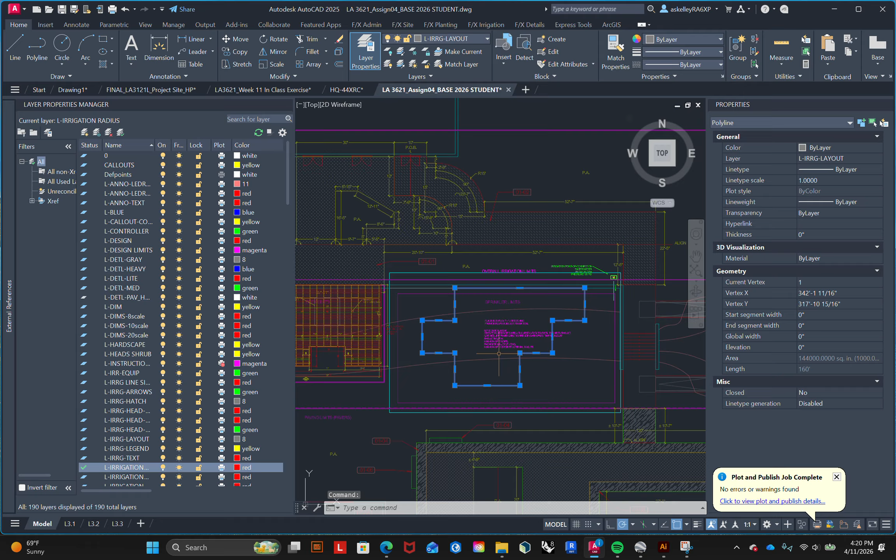Okay, tips on irrigation. So let's say we have this boundary. So I'm gonna bring it over here. And at the end of the result, you're gonna want to have something like this. So let me just bring it to the side quick. So this gray area is gonna be our landscape boundary.

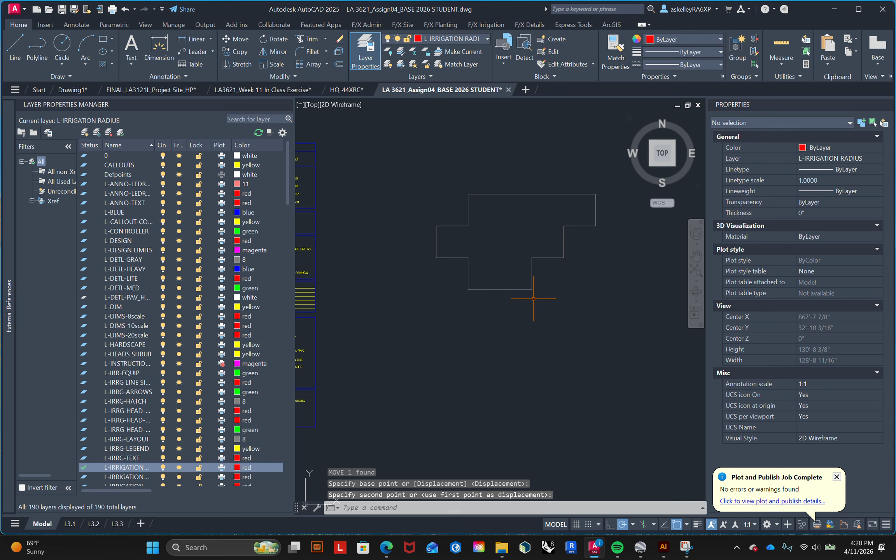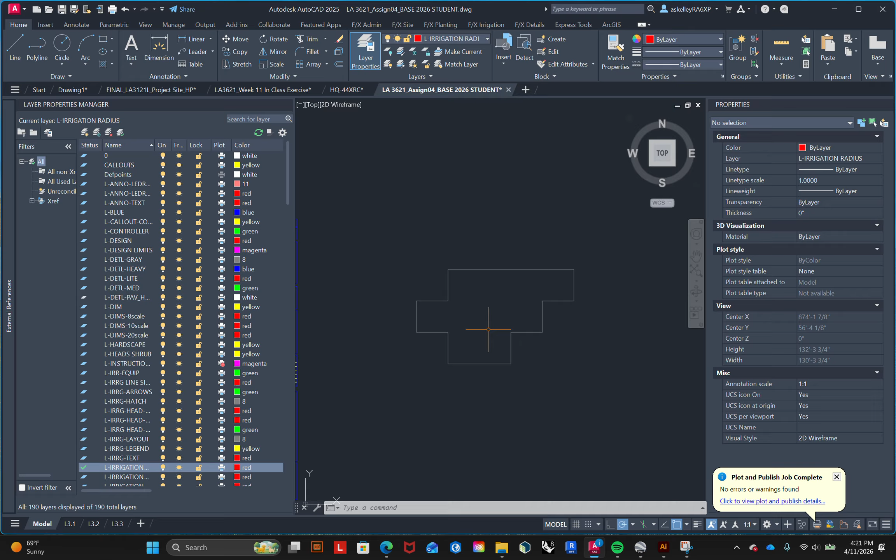And what we want to do is have sprinklers and have, in every single square inch in this area, at least two sprinklers spraying in the area without having sprinklers going over the boundary. So usually when approaching this, you want to start little first and then go big. So first we'll start with corners. And usually when it comes to measuring out how far each water should shoot out, you do the radius based on the shorter side.

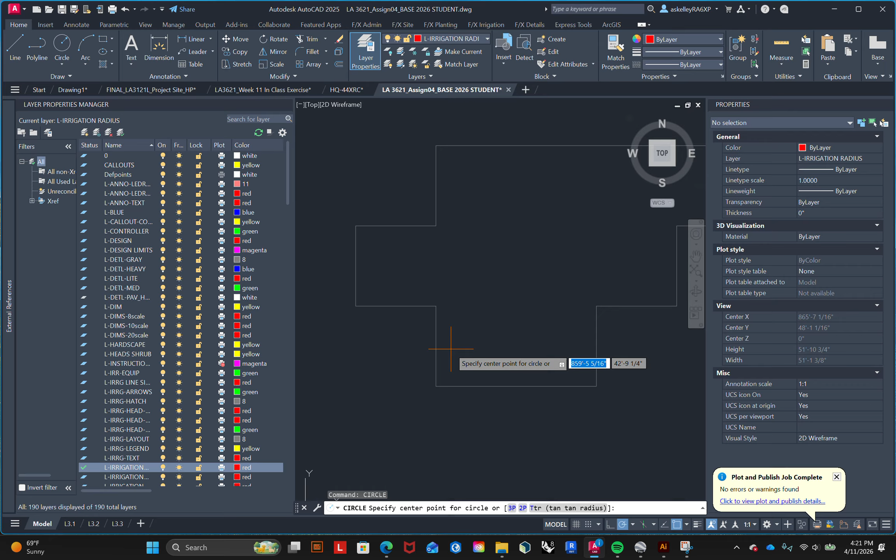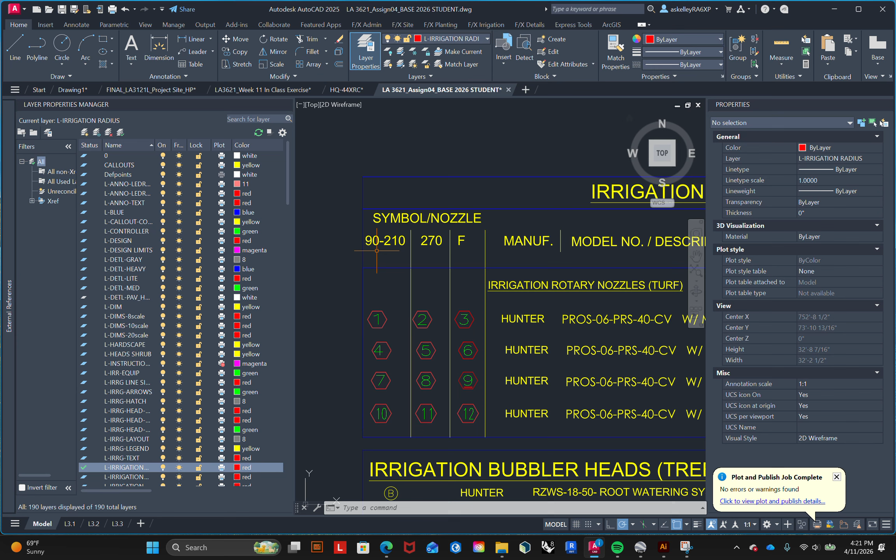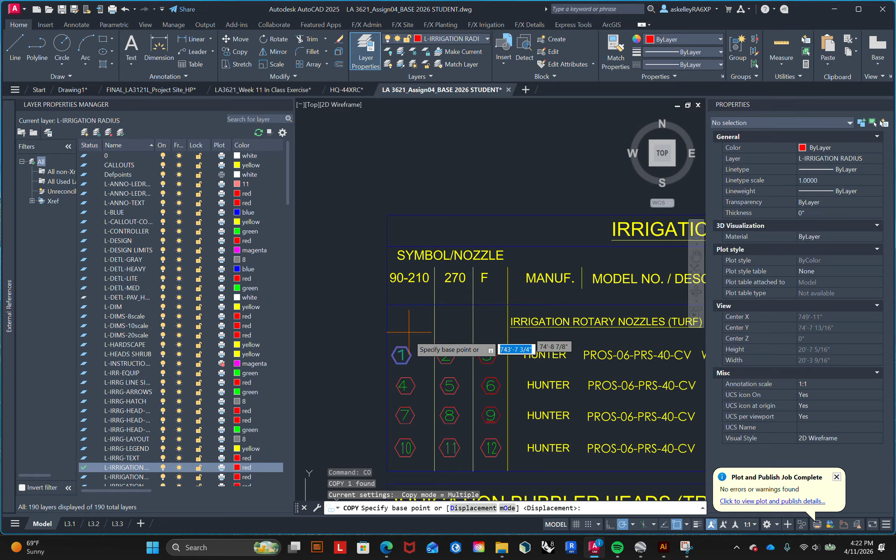So this is one corner. So this is 10 foot. So by looking at this chart, corner is 90 degrees. So 90 to 210. And what type is going to depend on these numbers. So since it was 10 feet, 6 to 10 feet, it's this. So we will use the 1 because it's 90 degrees and it's within the 6 to 10 feet range with that radius. So I'll copy this and place it here. Okay, that's one corner.

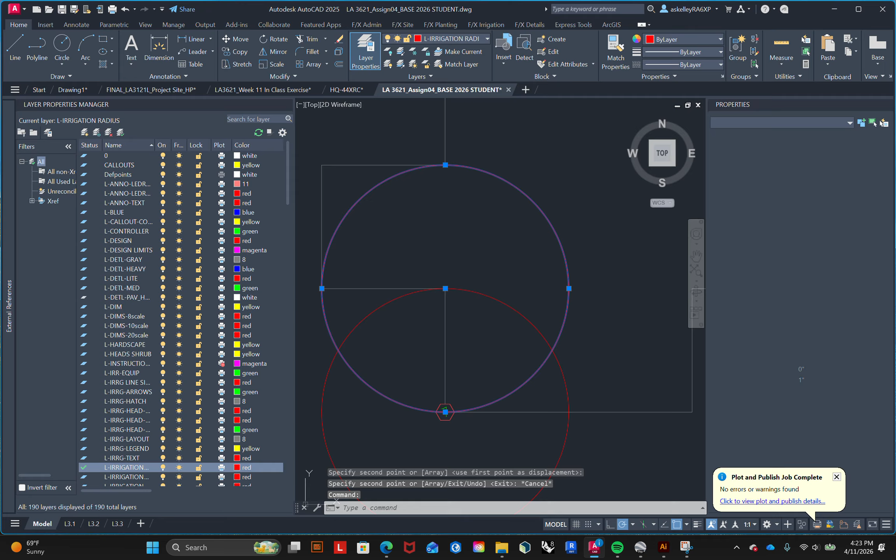But how about this corner here? Wouldn't you need a 90 degree? No. Because if you were to put a circle here, this square footage is 270 degrees. So since we want to start small first, we'll ignore this corner. But this one's a 90, so let's see what kind of circle this is. Okay, so it's 10 feet. So since this is pretty much the same thing, put this here. And this is probably the same thing too, so I'll put this here. This is a 270, so ignore.

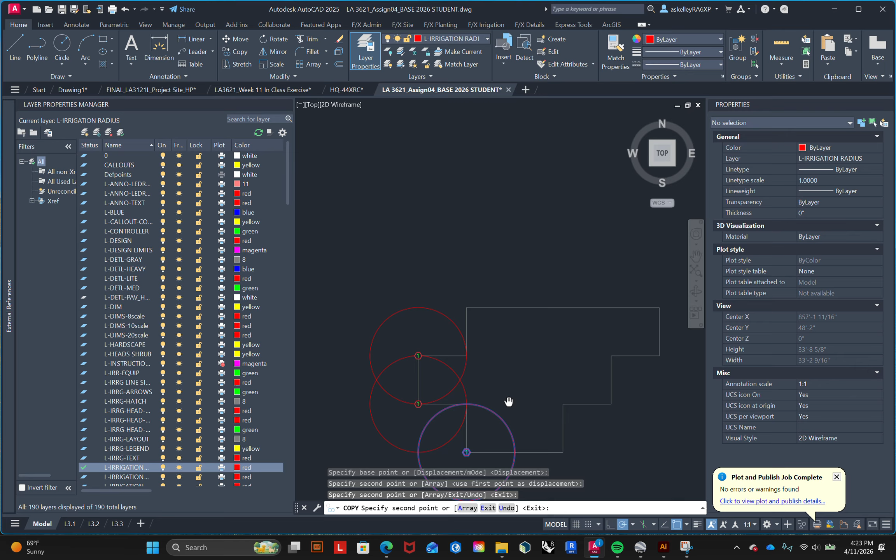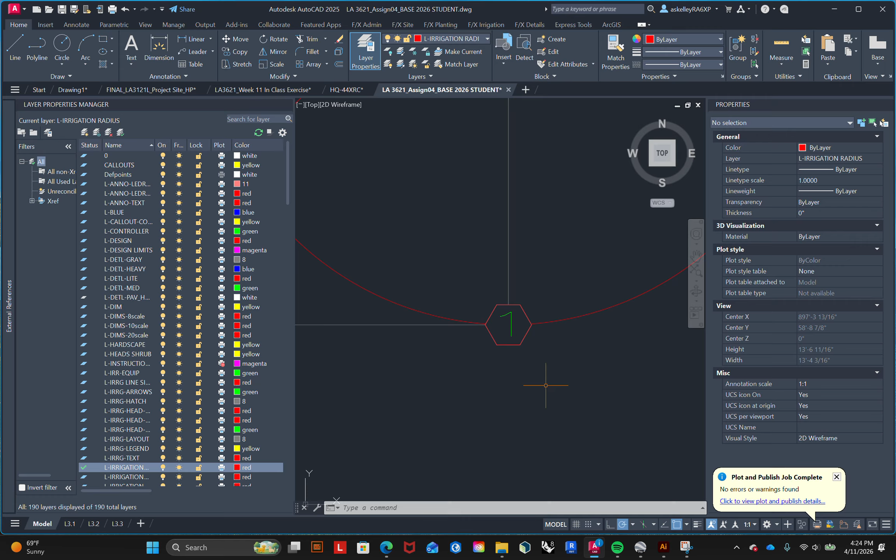So how about this one? This side and this side. Well, since this is the shorter side, we will be using that. So again, measure it out, and that's 10. So it's the same thing. Okay, the shorter side, let's just make sure it's 10. Okay, this is 10. You can also check, make sure if it's going corner to corner, the edge of the circle is going to meet the head of another sprinkler or another edge. That's how you know it's good. So this is a corner, and this is a corner, and that's it.

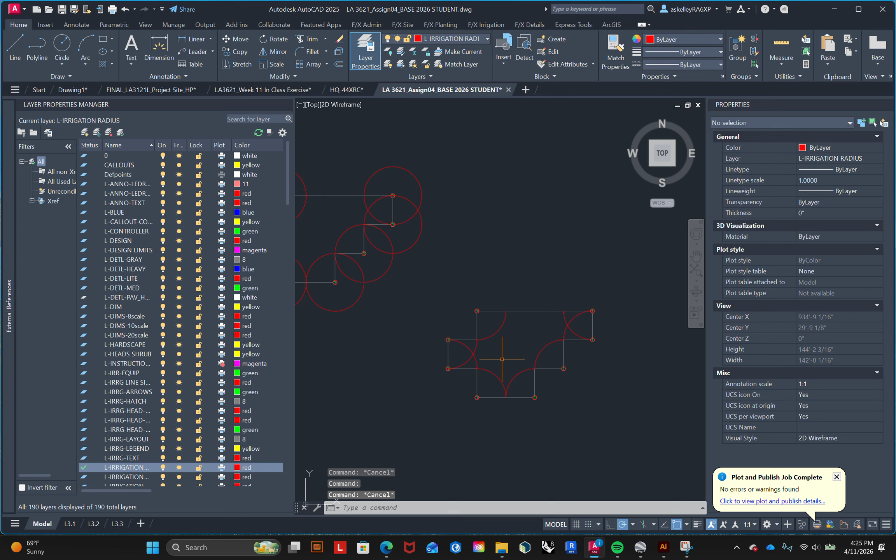So usually how I like to stay organized is color coding and cropping here and there. So let's see, make sure everything looks nice. So let me just trim the outsides. Yeah. So quarter sprinklers should be shaped like this, quarter of a circle. If it's not, then it is not correct. So now let's move to the other corners, the 270. Usually I like to start small to big, but I would like to have my corners done first. So we'll do the 270s and then go back to halves, which is 180. So 270s, these missing corners here.

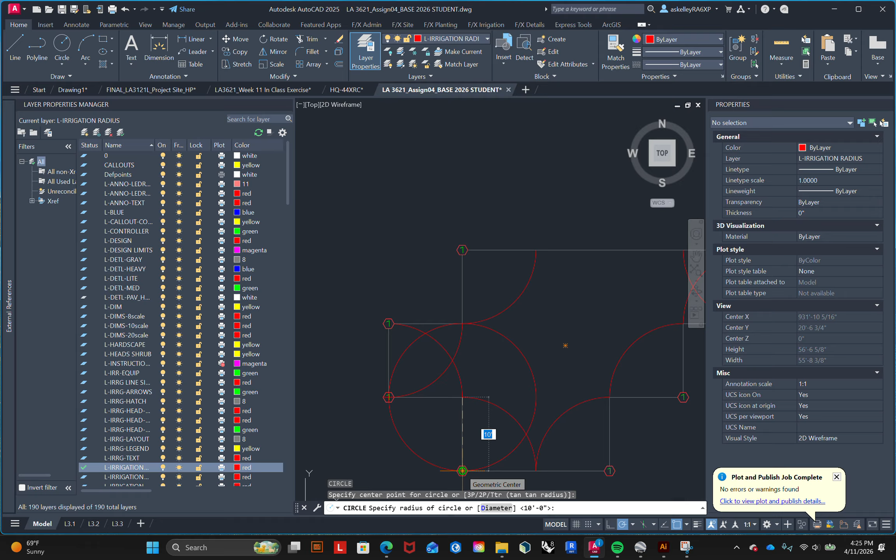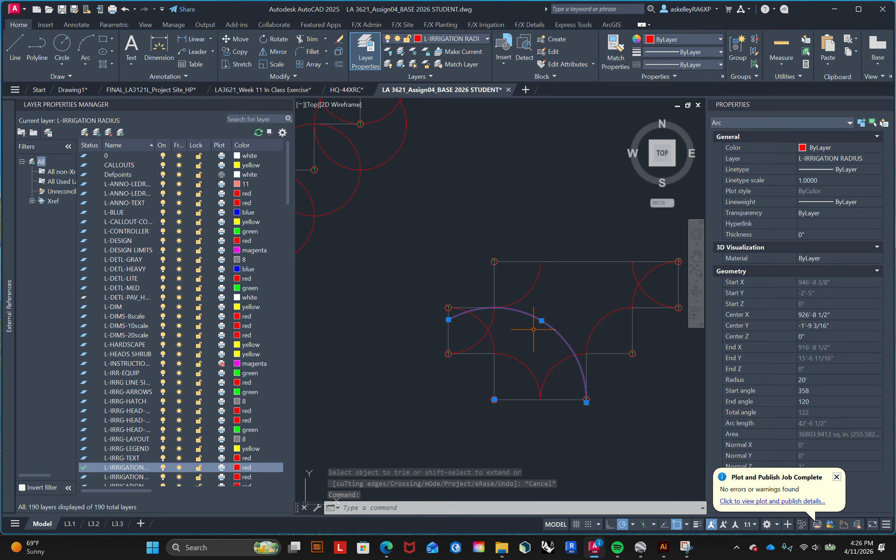So usually when you draw your 270s, you just make sure you're drawing the edge of the circle to corners. So corner can be here. You wouldn't want it to be up here. So that's way beyond that. Even if you were to crop it, it wouldn't be 270. Wait, here, let me show you. So like if I were to do this, that's a 90 fan. If I were to do this, that's wrong. Because look, if I were to crop it, that is not 270. It's going way over. So when you draw your circles, just make sure it fully represents that degree that you actually want to do.

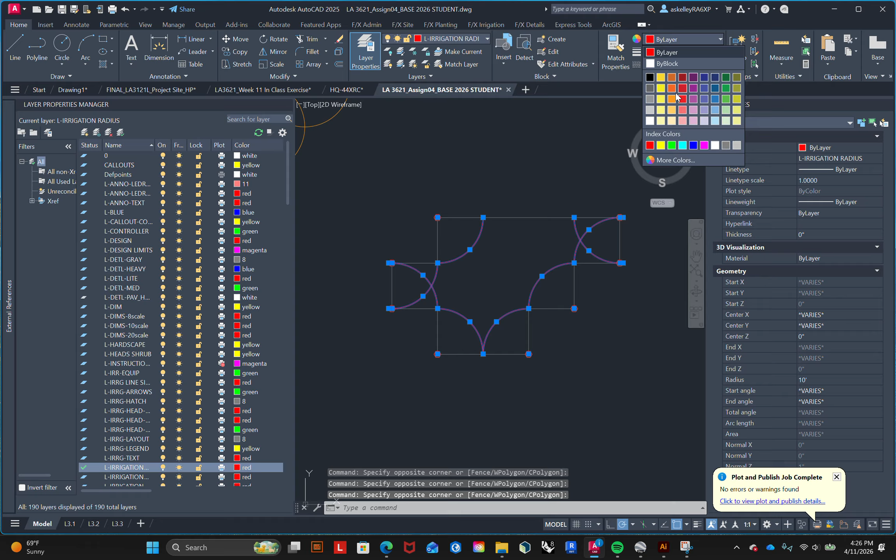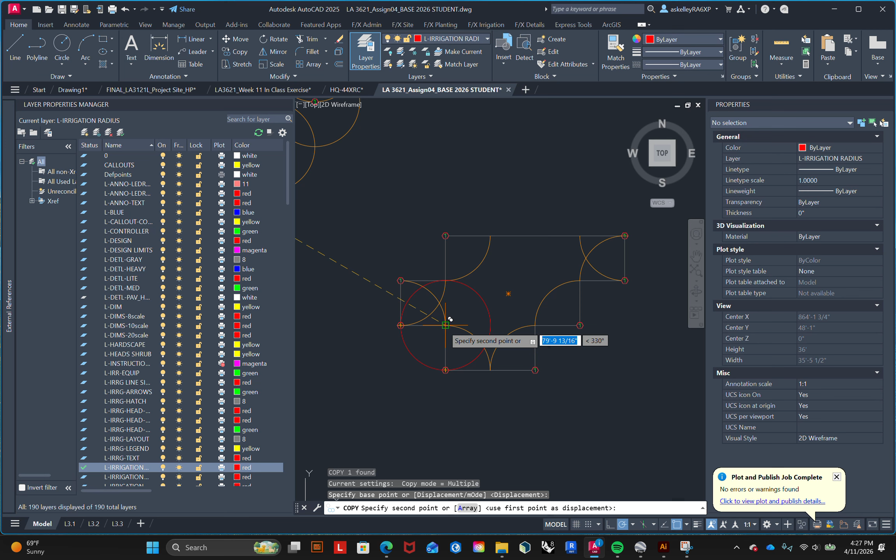So let me just color code these really quick. So these are my 90s, and now let's draw 270s. Okay, 270. I'll start at this corner, and I'll go to the shortest corner next, which is 10. So see, if I were to crop this, a fourth of a circle is being cropped out, and that's perfectly 270. It is not going beyond, because beyond is hard surface, and you do not want water to be sprinkling on hard surface, only softscape.

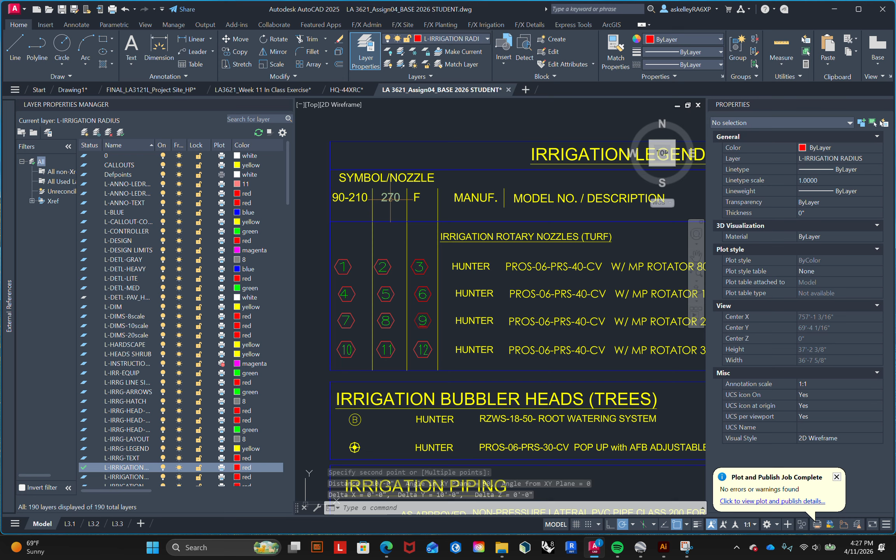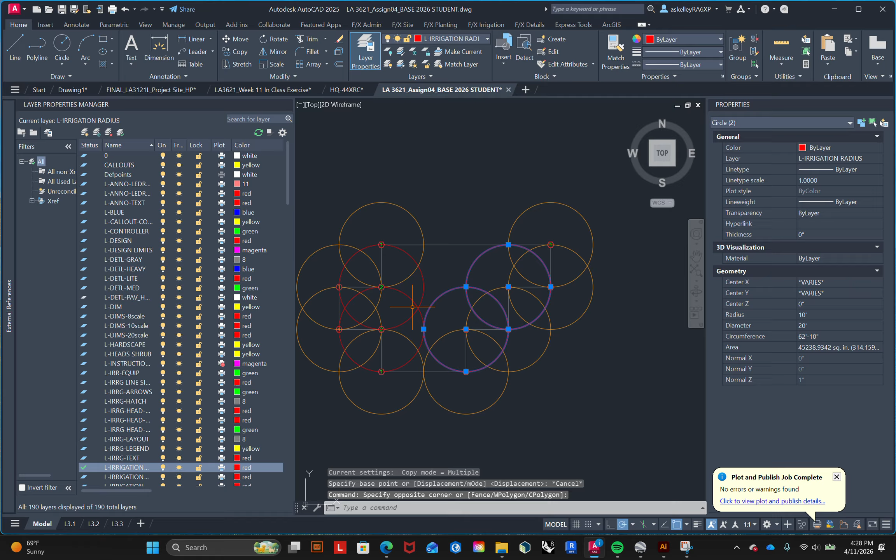Okay, so 270. And the distance was 10. Let me make sure. So let's go back. So we use a 270 circle, and the radius was 10 feet. So we'll be using the 2. Okay. So another corner here. And see, matches up the corners perfectly. Corner here matches up great. Corner here matches up great. Okay. And now let me just change the colors first. Stay organized. And then let me just crop this real quick.

Okay. So see, perfectly 270, perfectly 270, 270, 270, and they all match up with the corners. Going from head to head with the sprinklers. Now let's do halves. This is when it gets a little harder.

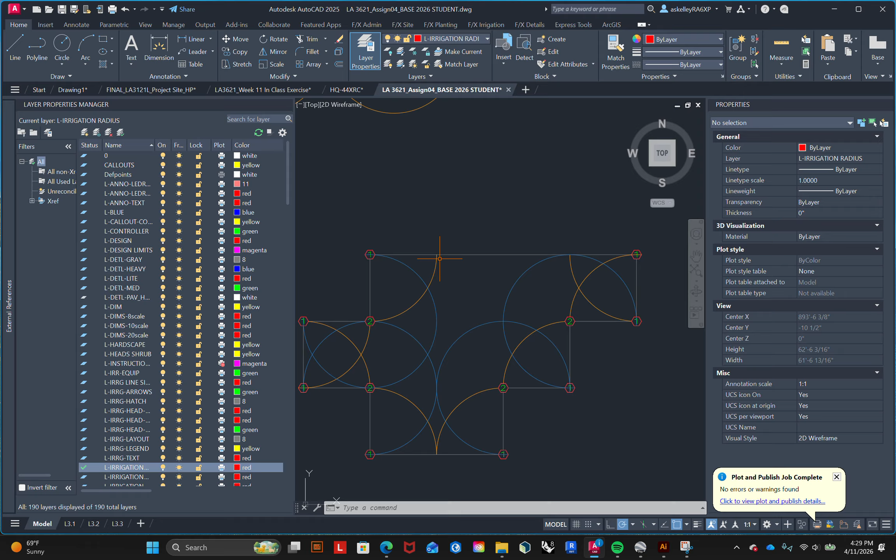So halves, how you know how wide each half is: you divide each side evenly and make sure the bottoms of each half reach to the bottom of heads or corners, edges of other sprinklers. So let me just, so also we already know we won't need a half here because already 2 sprinklers are pretty much filling up this area. What I mean by that is looking at each little space here, we can tell.

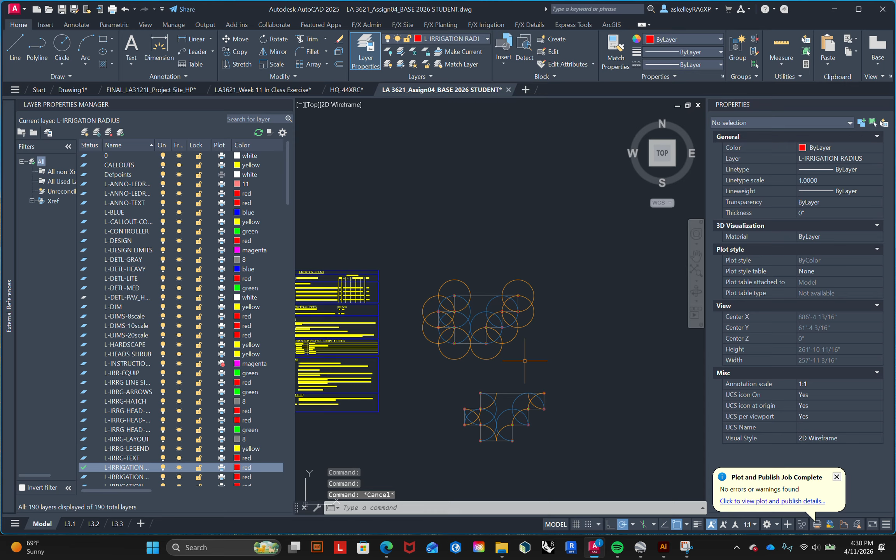Like for example, this corner right here, it's covered by this sprinkler. That fills in all this. And this 270 sprinkler covers all this. Here, I'll give you a good visualization for this real quick. So looking in all these areas, this 270 fills in all this, and this fills in all this.

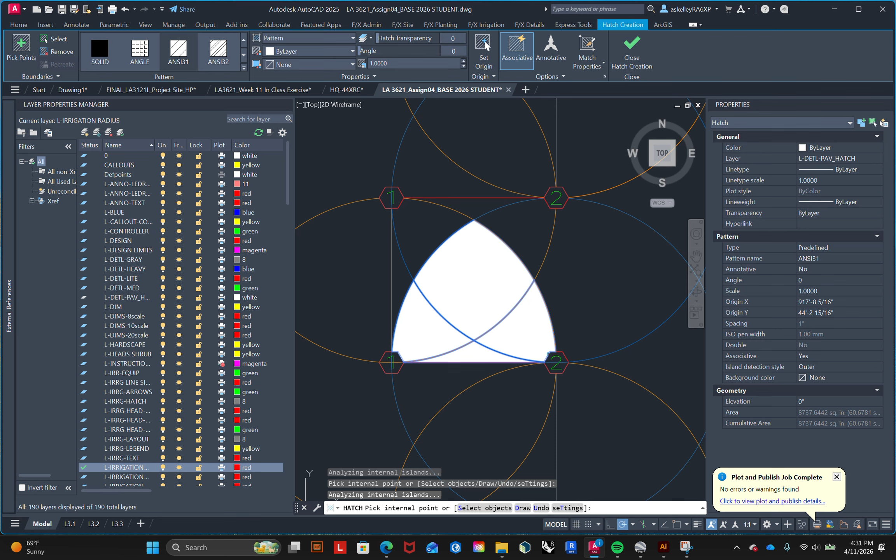So looking at where these two overlap, we know it's this, this, this, this, this. And we can also apply. See, these two are overlapping, so this is filled. And this is filled. So yeah, that's how you know. That's a quick way to know if things are being filled by using the hatch command.

So we can start out with a half circle here, because we know this area right here isn't being filled. This is only going up to here. This one is only going up to here, and these two aren't reaching. So we will need a half right here. So to do that, circle, and have it meeting with halves. But it can't go to here, because it's going beyond these ones here, and that wouldn't work. So usually you go to the shortest, nearest sprinkler.

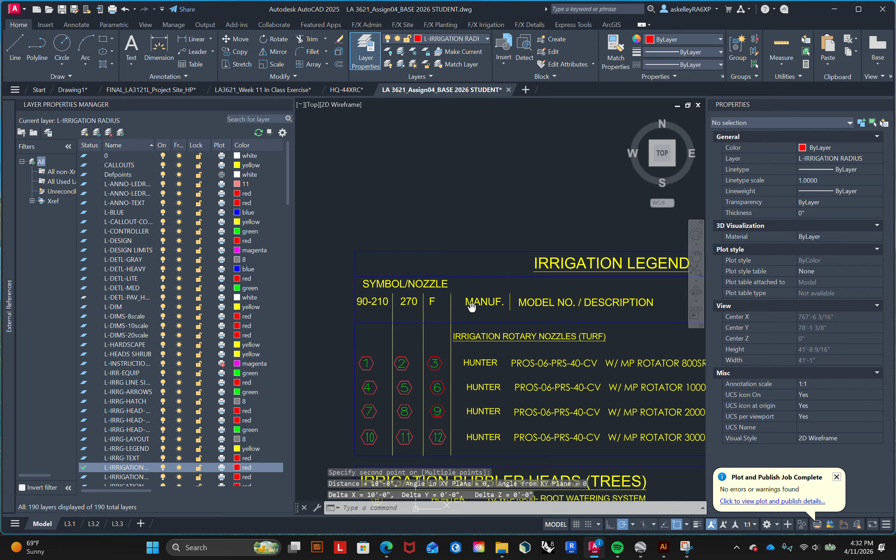Okay, so let's check the distance. 10 feet. So looking at halves, it's within this range. Remember, 10 feet. So it's 1. Okay. And we'll probably need one for this side because all this area is being sprinkled. This area too. This one too. So to do so, let's make a circle, starting at the middle, and align it with the shortest edge sprinkler, nearest edge.

We don't go to the nearest edge of this because that's not an edge of a circle. When I talk about edge of a circle, I'm talking about when the other sprinkler circles reach the edge of the softscape area boundaries. So it'd be here. So there's one half circle. But then I drew this circle, but do you think I need any more? Well, when you draw half circles, let me put the sprinkler number in first, real quick.

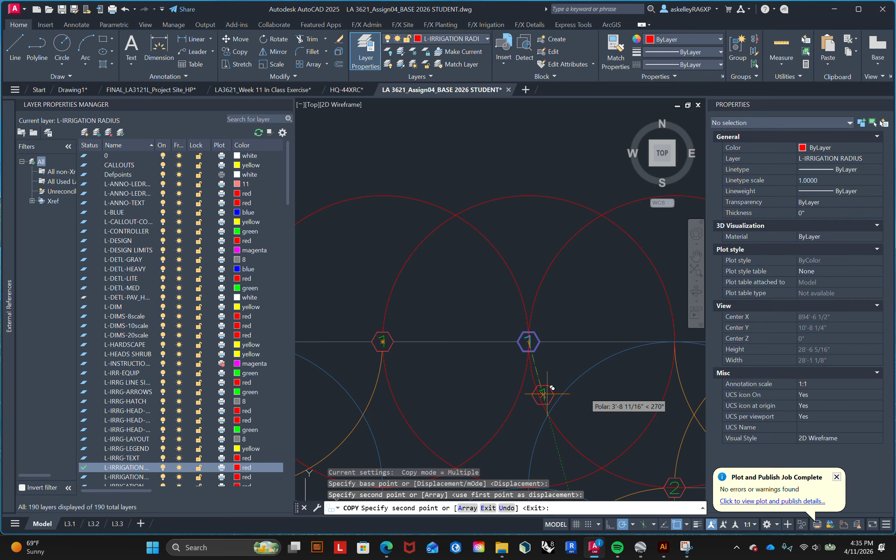Well, when you draw half circles, you're gonna want other edges to be meeting it. So we'll have to make 2 more half circles. I'll explain after I do it. So meeting at the center of this half circle, we're gonna have to meet from this center here to here. We want edges of one half to meet here to here. So at this center here, and meet it. And we'll do the same here. Oops. Now I'll put 2 more sprinklers. Okay, so that is about it.

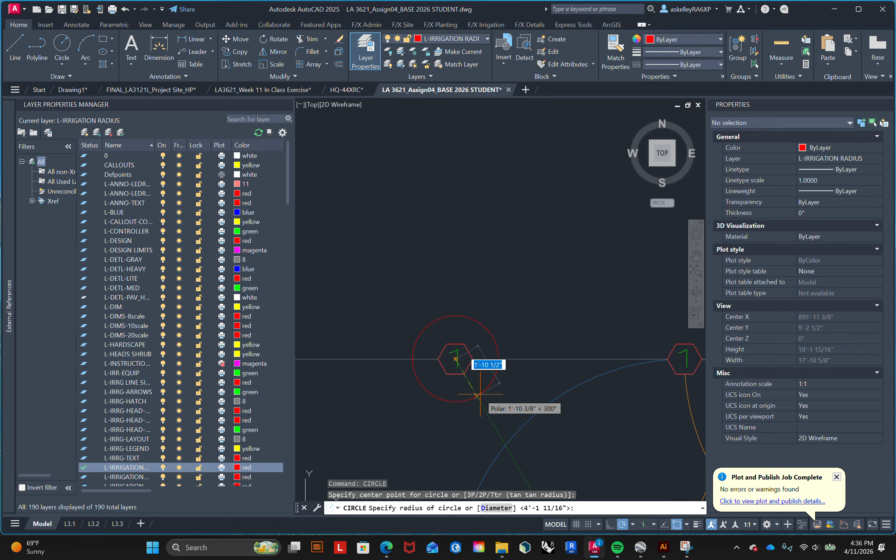Halves. So again, the reason why I did it at that specific measurement, why 10 feet? If I were to do that first one less than 10 feet, like about here, you're gonna need too many sprinklers. It's gonna be a lot more, like here and then here and then here and then here. Something like that. It's too many. You want to use the least amount of water. So again, 10 because we're going from the edge of the nearest, like I said before. So edge of nearest. And we would want 2 more.

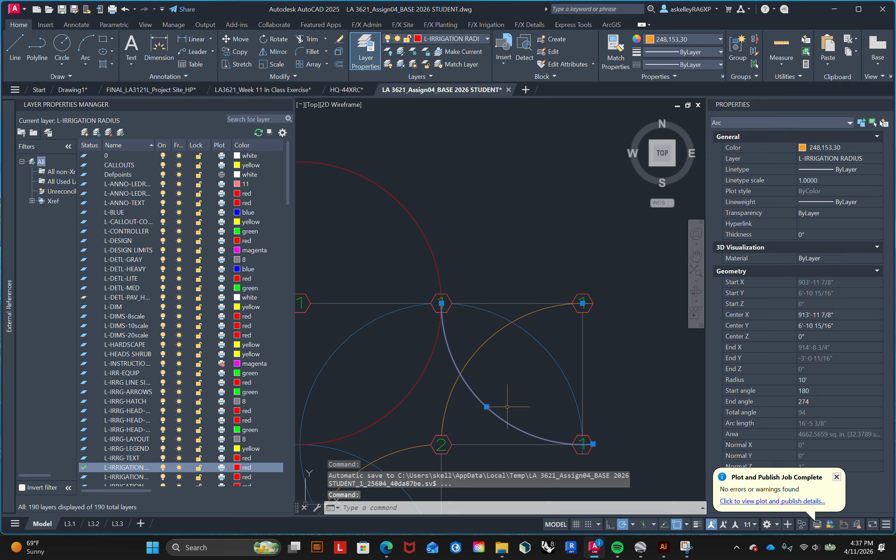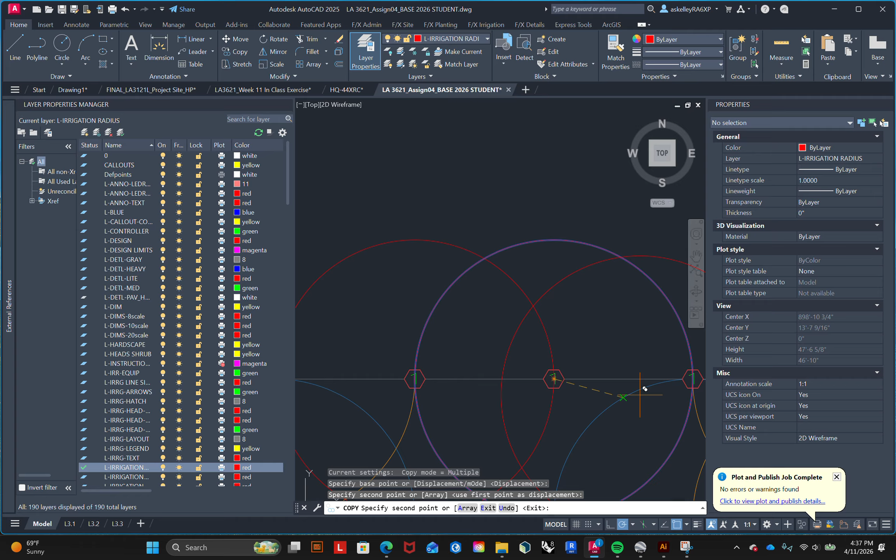Why? To fill in this extra void of no water over here. I mean, no 2 crossing sprinklers of water crossing here. And even though this area is filled in, this area is filled in, this area is filled in too, we still have a void right here. And we need more sprinklers. So that's why we need 2 more, just to fill in more voids. It also makes more sense to have these half circles evenly divide and meet both sides, the other sprinklers' edges. So we quickly organize.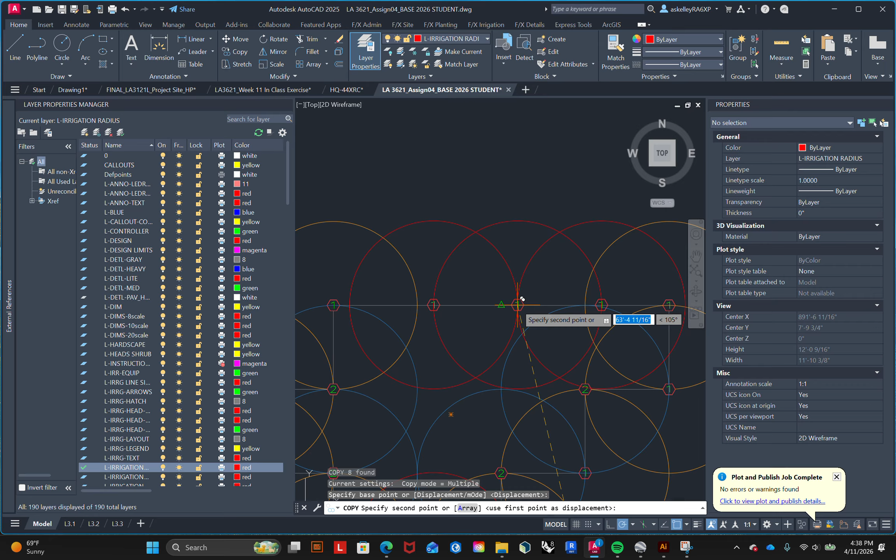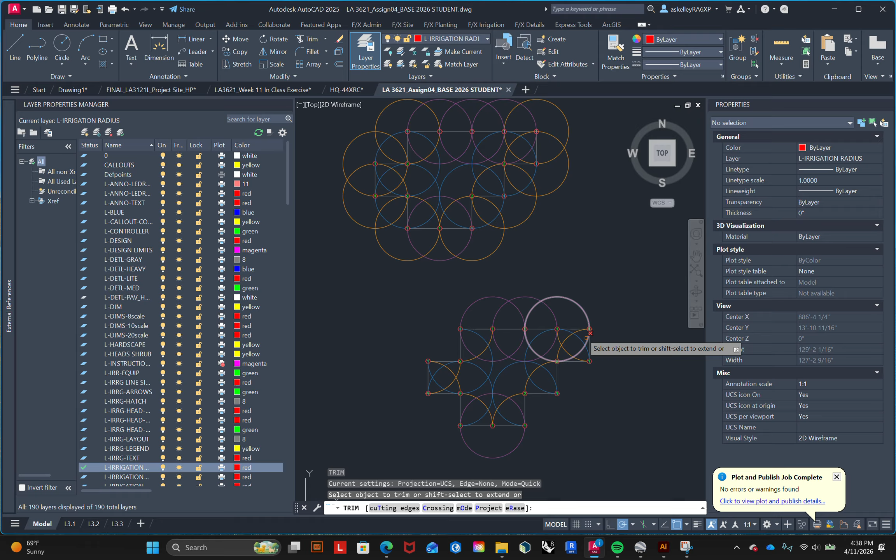And color code. And then now we'll be doing full circles. Now, how I usually check where I need full circles exactly is when I hatch everywhere. Sloppily hatch. So let me get these and start hatching.

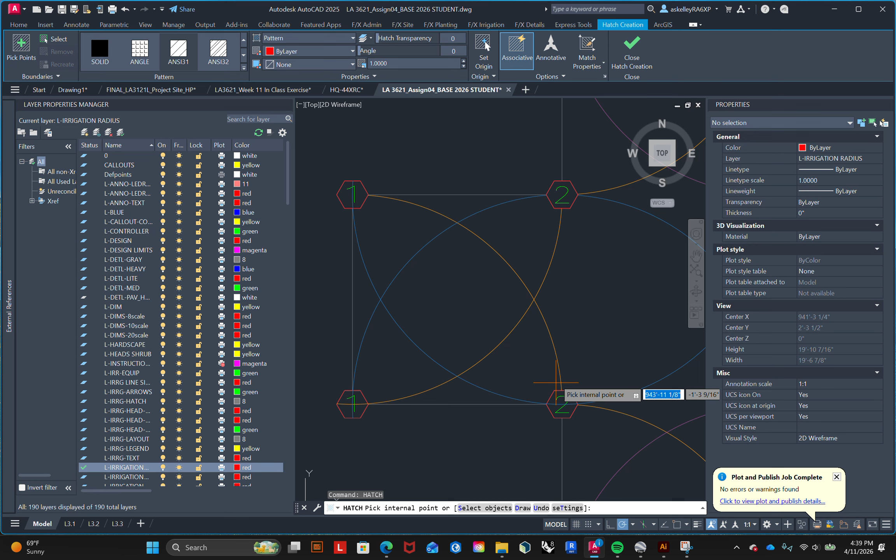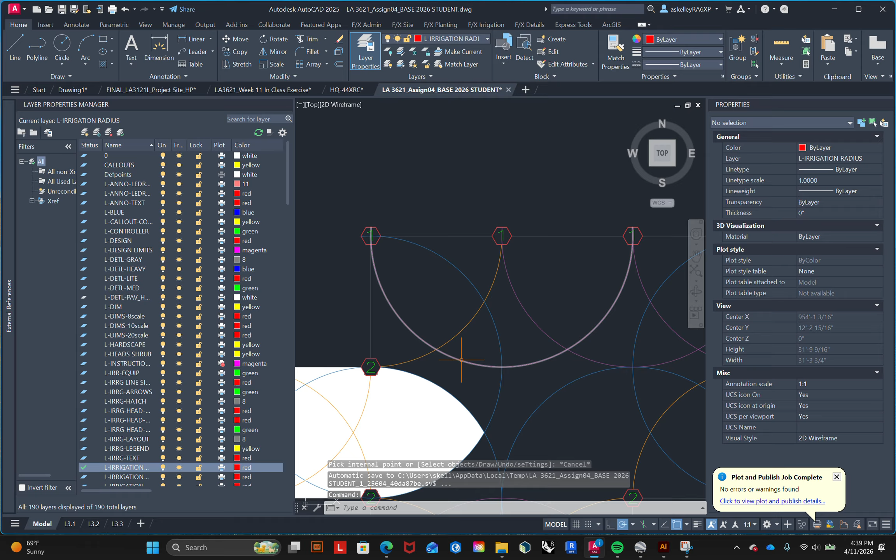And so you can skip this part if you want, but I'm gonna start making sure areas have double sprinkler. So looking here and here again, double here, double here, double here, double here, double. This circle with this area here, this circle reaches over and this circle reaches over. So it's a hatch. That one's good. In this area, this circle reaches over and this circle reaches over. So all that is filled, so it's all good.

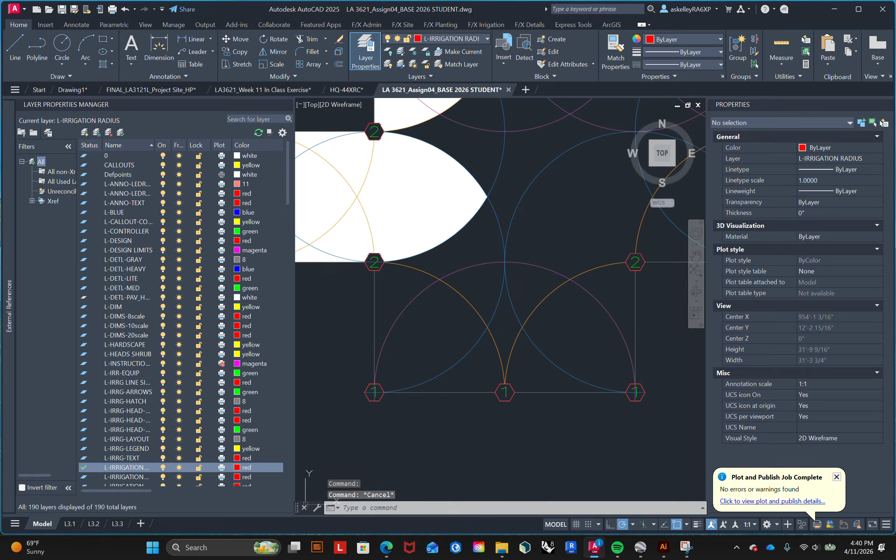So good. Look down here. Within this area, this circle goes in, so all this is good. And this circle crosses over too. So this leftover is good too. So within that area, it's all good. And it would be the same thing for this one.

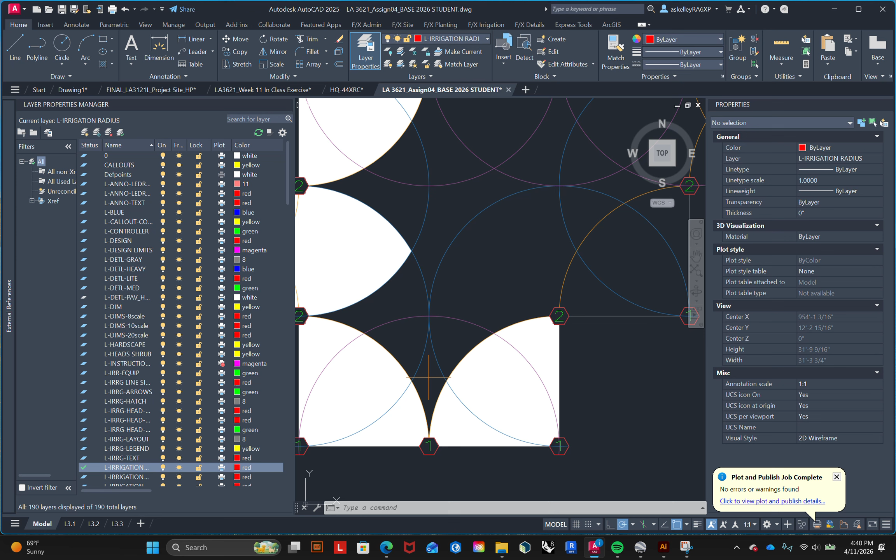Now, this is when a problem occurs. So within this area, this circle crosses in here, and this circle crosses in here. But what about this little diamond? No, nothing. It's only one of this half. So we'll need to have a full circle reaching in here. But for now, we can hatch and say, hey, this is double. This one. This one and this one crosses in here. This one and this one crosses in the rest. So we can hatch it.

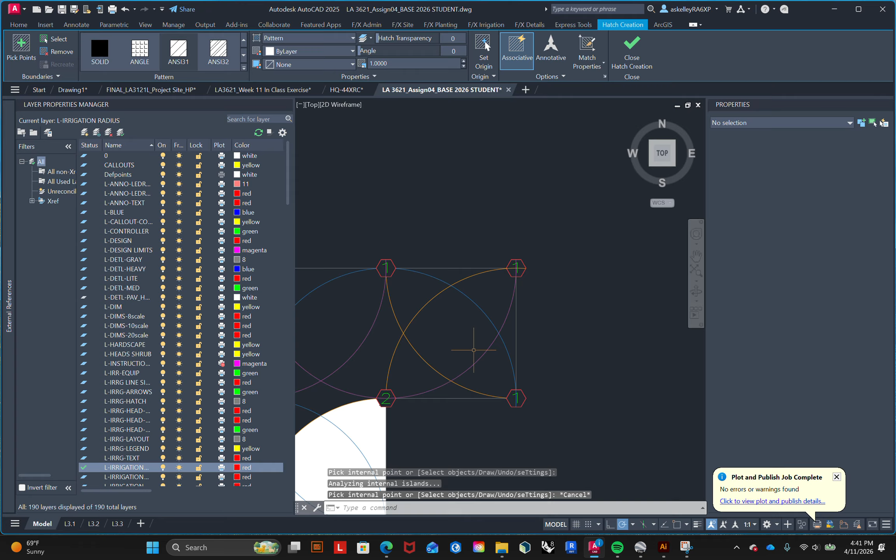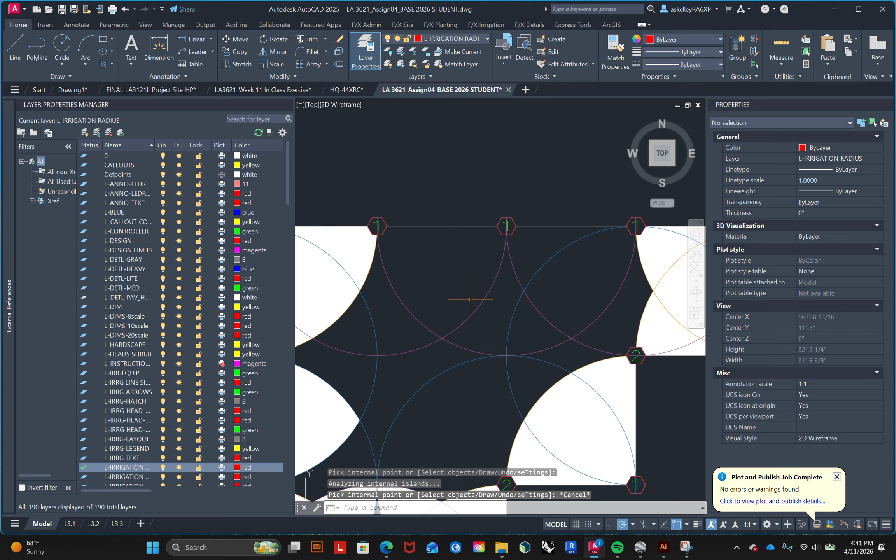Same with this. All these two hatch. So this whole area is filled. This whole area is filled. So we're all good. It's okay if you triple sprinkle, quadruple sprinkle. You just need to reach the bare minimum of double sprinkle. Okay. This one and this one crosses over. So this area is good.

Now, this is when it gets a little difficult. This area does not meet it. There's only one sprinkler. This one's not hatched. This area only has one sprinkler. Nothing else crosses over this area. Only this 3/4, 270 sprinkler reaches this area. This one goes here, these two, so these two cross, but nothing crosses here. And this sprinkler, we go over here, cross over here, cross up here, and cross up here.

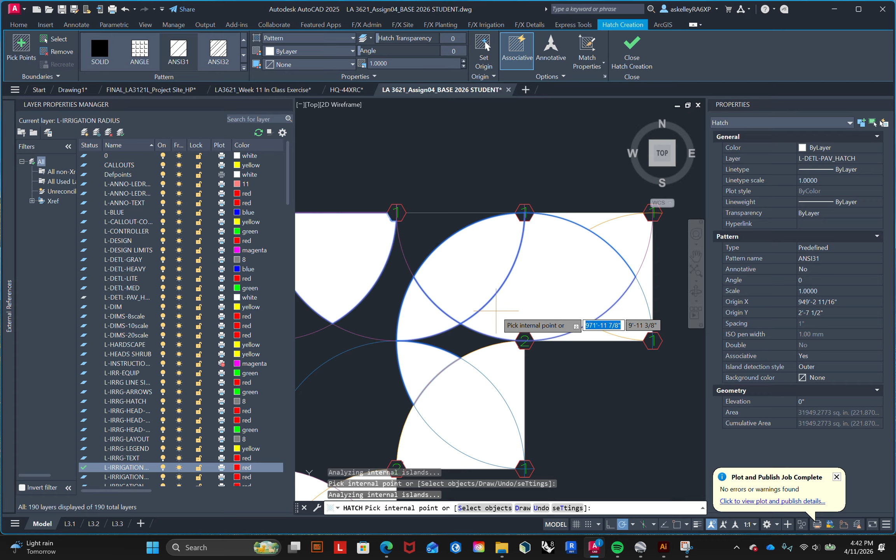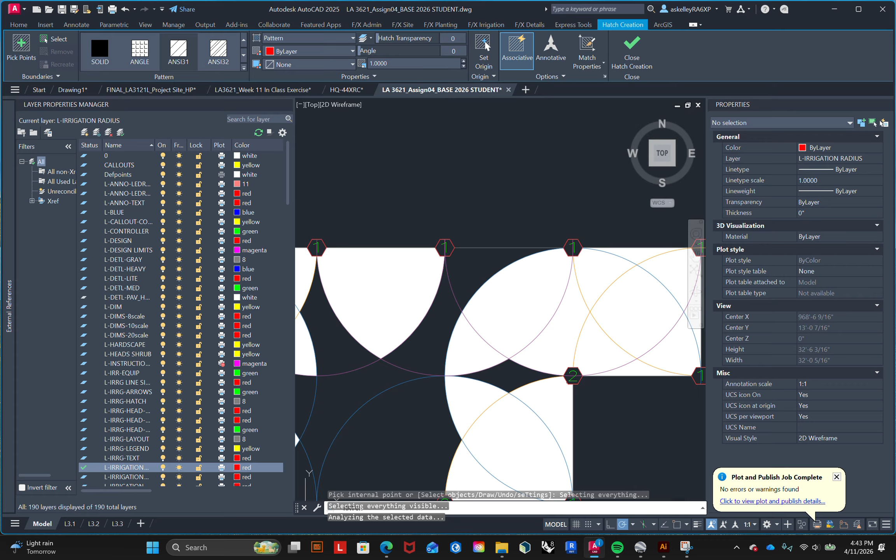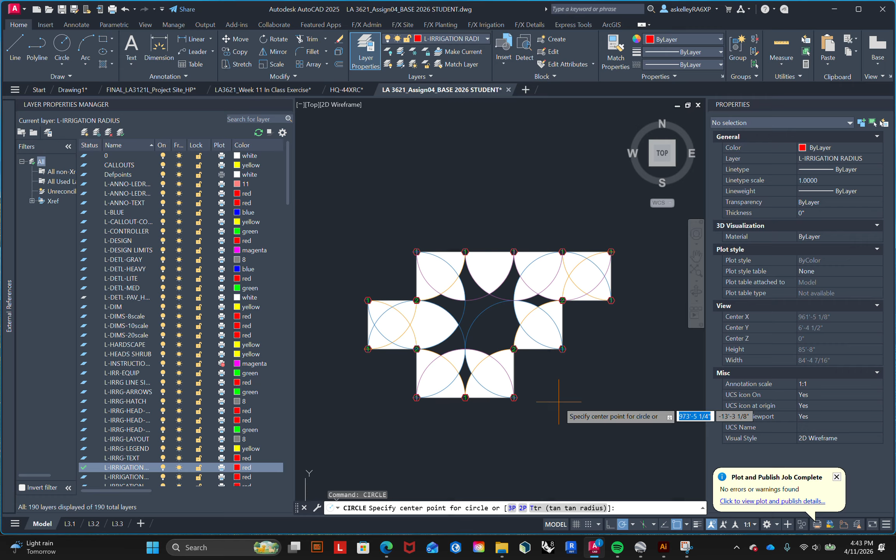So anything cross over here? Let's see. Sprinkler, no. Cross over here, no. No. So this is an empty spot. This is a big empty spot. This is empty. This is empty. And these two cross. Okay. So this is a little bit of an awkward looking area, but this is where we'll have to put in the full circles. So adding full circles may be a little hard, but don't worry. Once you put in the first one, the logic comes in after until complete.

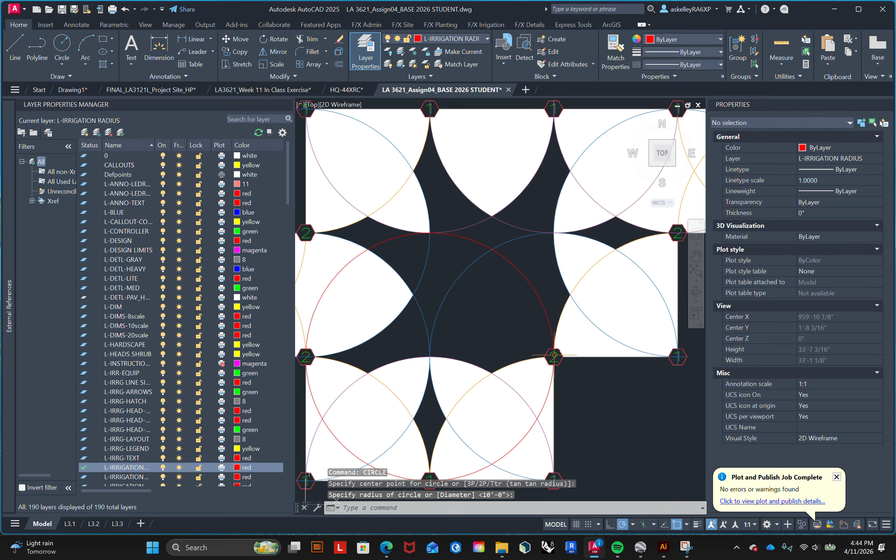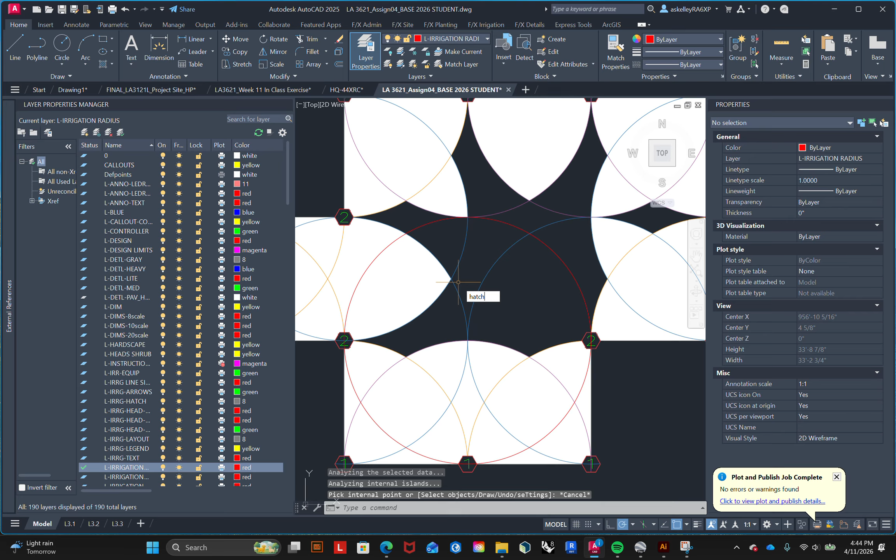So one area where I would like to start putting full circles is where you kind of see like a butterfly looking shape. So kind of like two wings, kind of like this one. And then I would put a circle in. And you do it based on closest sprinkler, so it'd be this. And so that means now everything within this circle is good because this sprinkler and this sprinkler crosses. So it's hatched. The sprinkler and the sprinkler crossed over. Hatched. It is the same for that other side. Over here. But not over here actually. So that means we still need more circles.

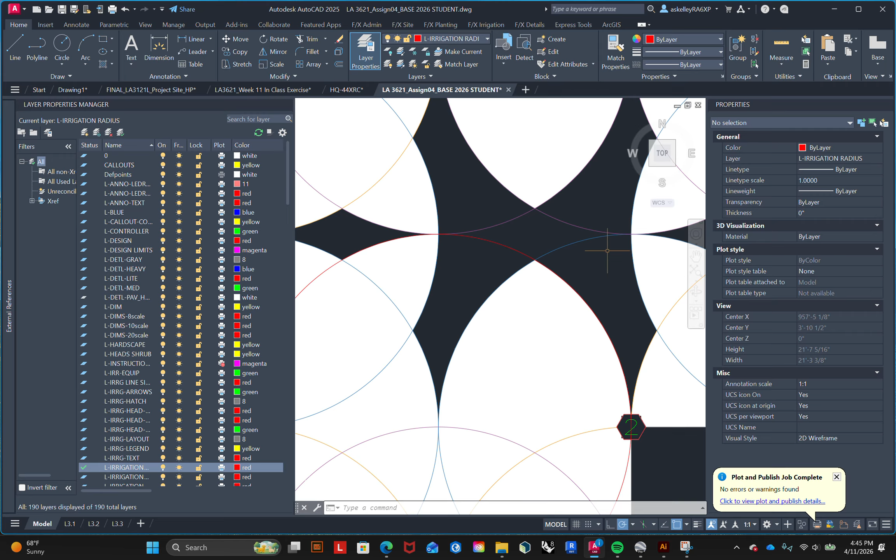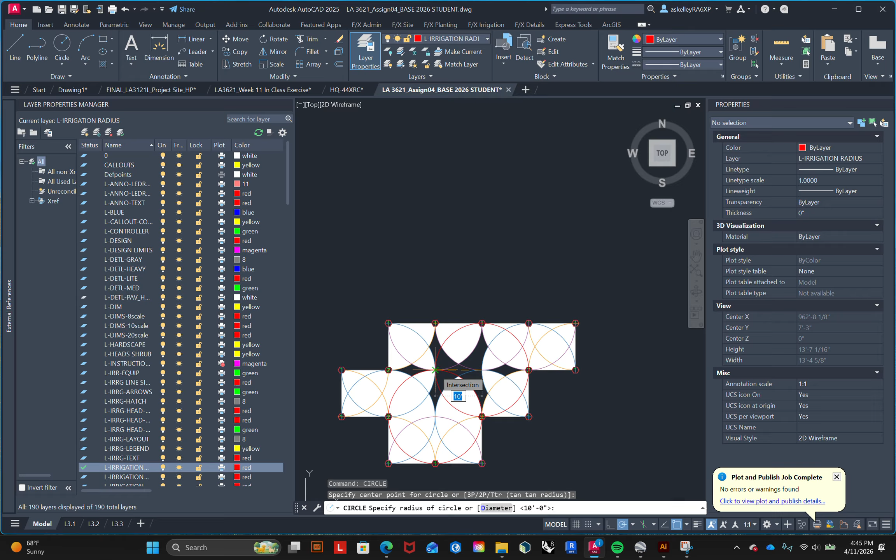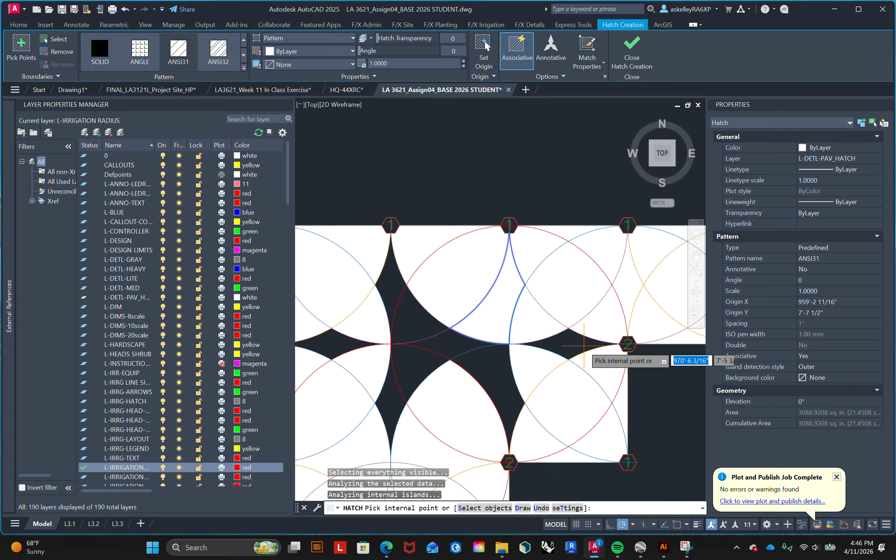So how do we know where to place the other circles? You look for more of these two circles joining each other type shapes. So it would probably be here. But how big is it supposed to be? You meet it to the edges again. So it'd be here. And let's see where these cross. So this circle, wait, let me. So with this circle hatched, within it, this is hatched. This is hatched, this is hatched, this is hatched. Yes, and yes. We still have these gaps.

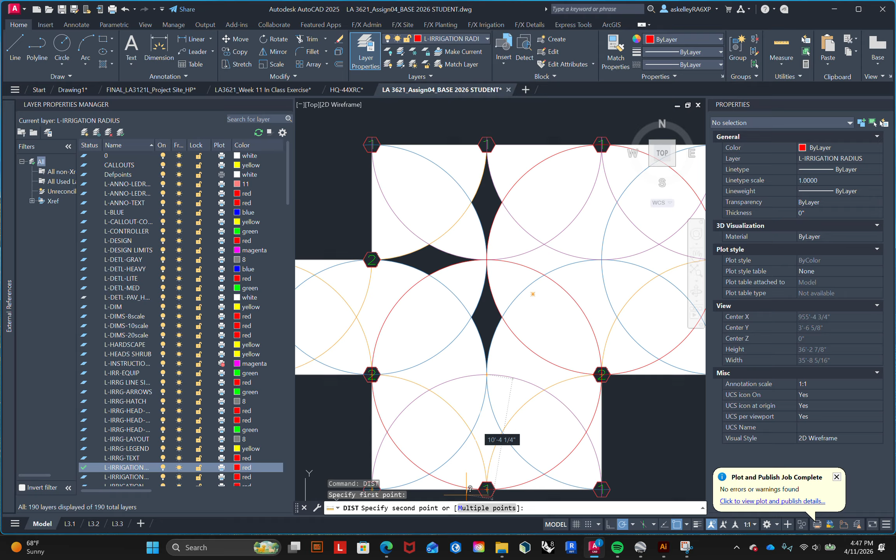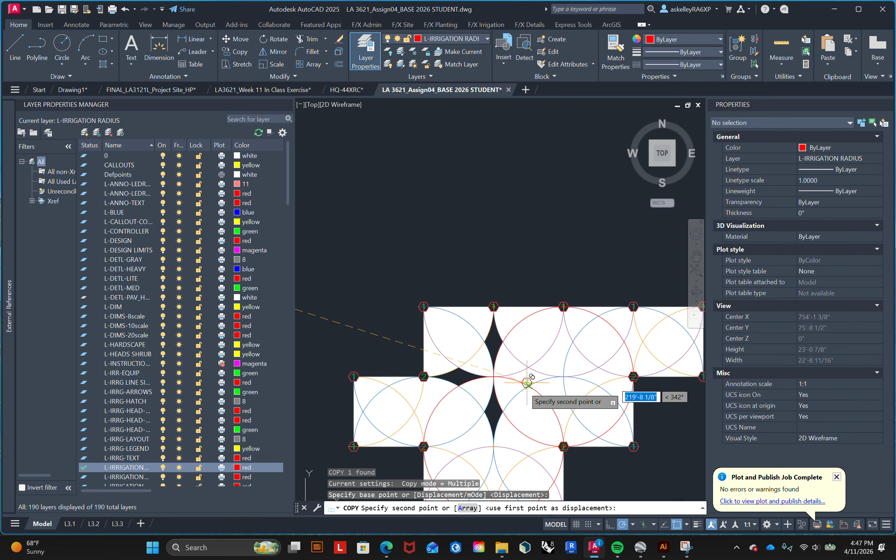Before I go on, I forgot to add my sprinkler numbers. So again, from the middle to the end, 10 feet, and then middle and 10 feet. So with full 10 feet, we'll be using 3. Okay.

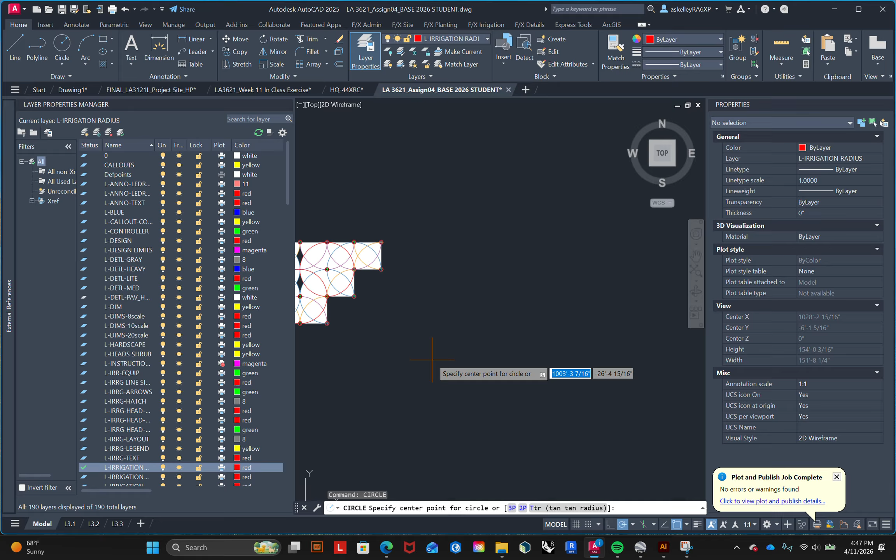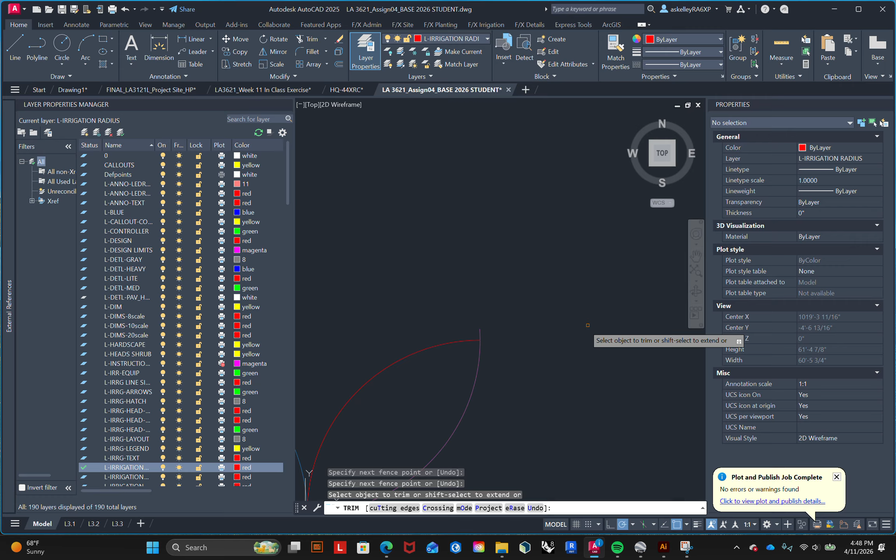So it makes sense to have a circle that has an arc between all these sprinklers. Perfect. So at the center here, because it looks like a butterfly. When I talk about butterfly, I'm talking about a shape like this. Let me quickly copy all these. Talking about this shape. That's when you know. It's kind of hard to explain, but it perfectly meets. So everything's filled in now. So this is the end result.

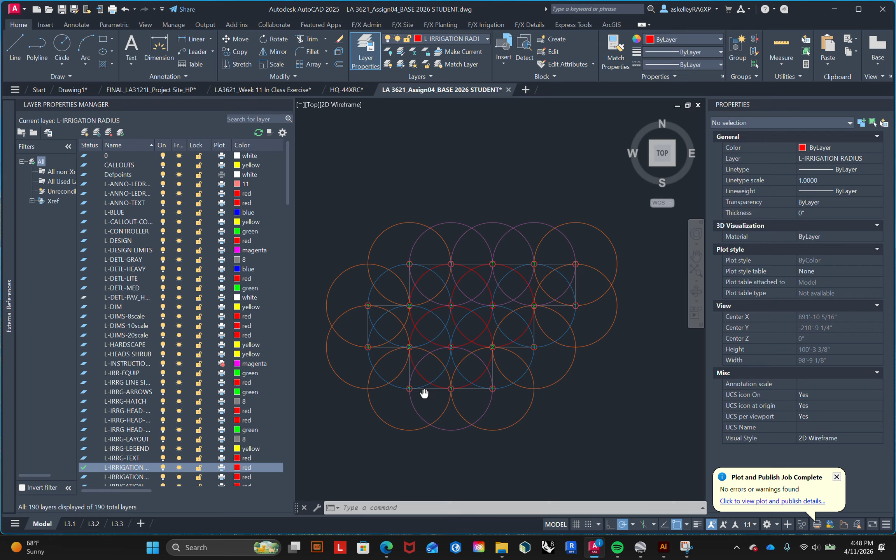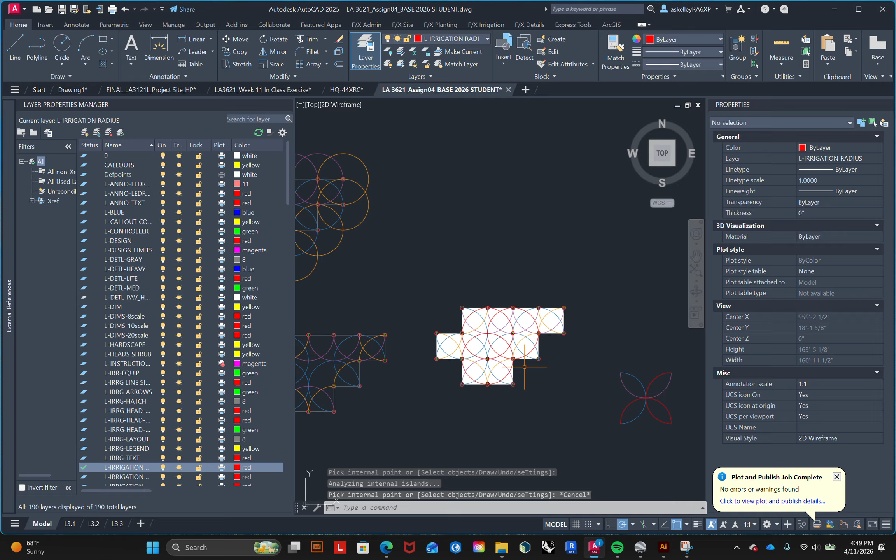So let me hatch. Make sure. Yes. These two cross. This one crosses and this one crosses. Okay. Oh.

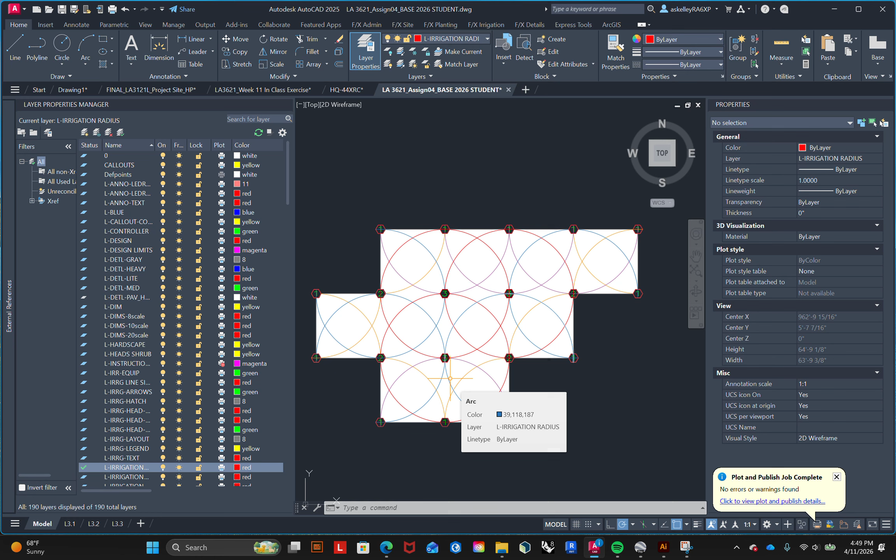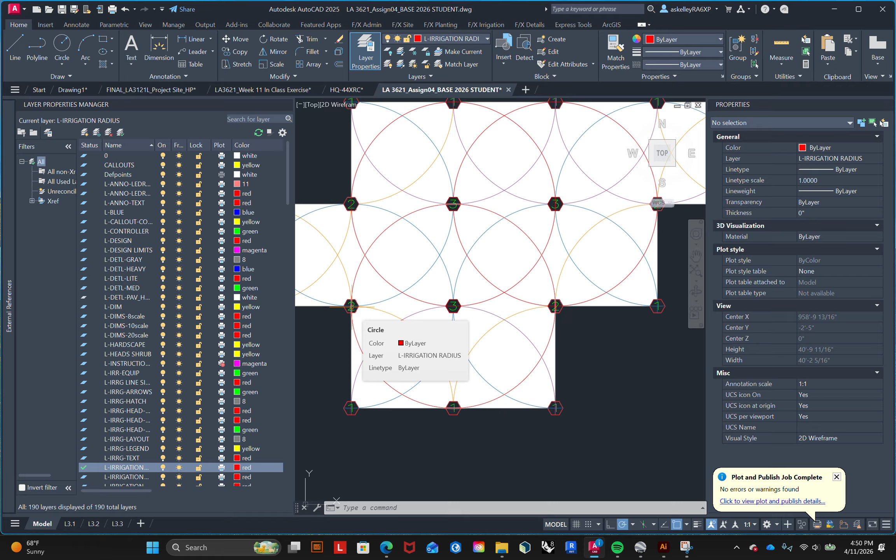So it might be a little confusing with the exact distance of circles, or where exactly the circles go. But just remember that when circles are drawn, make sure they reach the edges like this. The circle reaches the shortest distance of the nearest sprinkler, and location is based on the edges of other sprinklers and edges of the planting area itself. It should work out.